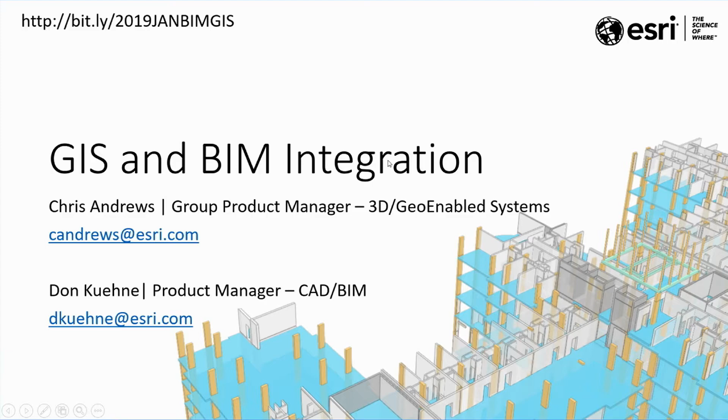I've started adding this simple safe harbor statement. I think Esri will probably have a few more things like this in the future. I'm happy to talk about future stuff, but you just need to understand that you can't blame us later if you make a business decision and we change our minds.

It's pretty standard at other companies, and we're starting to see Esri professionalize a little bit like that. The team that Don and I work with, if you look at it from one direction, we're called the 3D and Geo-Enabled Systems team, which is a mouthful. But if you look at the product areas from a different direction, it's actually kind of the entire smart cities and project delivery story. So we cover apps for EMS, police and fire. We cover apps for asset inspection. We cover apps for urban planning, utility, parcels, AEC, CAD, BIM, a variety of stuff in the team that we have, and we're expanding quite a bit, and we're going to be doing more.

Jack and others talked this week about the geospatial cloud being kind of not just a rebranding, but a reformulation of our core technologies for on-premises or cloud-based delivery of geospatial capability anywhere across large organizations. And then there's this other thing they talked about, which is that we also are recognizing more and more—and I've recognized this since I started my career—that many people who use GIS information never want to spell GIS or hear GIS used. So these systems are largely focused on people who really don't care about GIS, they're just trying to get a job done. And we hopefully will see more come out of our group around that kind of concept.

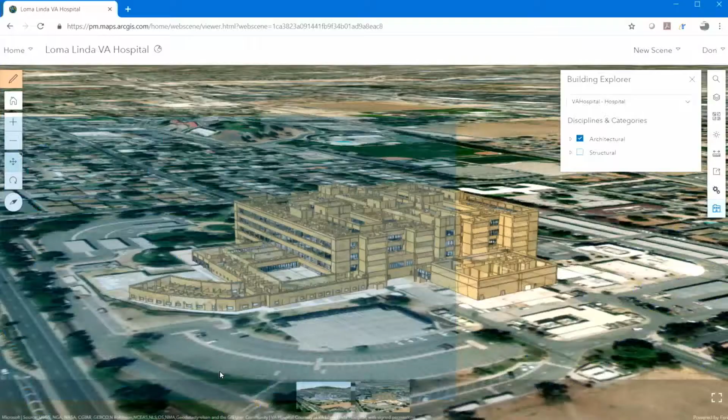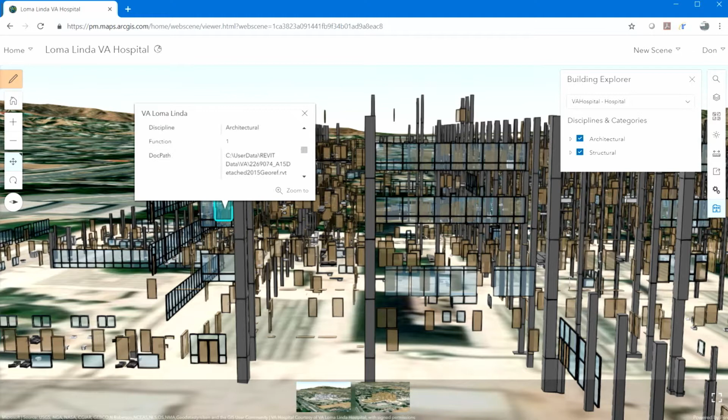I don't know what's going on here. Do you have anything? But as soon as we started saying that we could handle massive data sets, people started sending entire buildings, trying to shove entire buildings into this data format. You know, maybe I can Skype over to you or something. This is weird, I haven't had any problems all week, so let's try that really quickly. Are you online? Because I am. Hold on, sorry folks. I will ping Don and we will... I may not be on. Nope, it says you're offline. Are you offline? Sorry, folks, we tested before, honest.

That's fair. Yeah, I'm going to Skype to you. So as soon as we started to say that we could handle really large data sets, people started basically shoving whole buildings through these formats that we were coming out with. Oh, Skype, so. And that was a big problem because what we often then got was that the initial scene layer formats and things we had basically couldn't handle it.

We had a lot of performance complaints and a lot of issues that were brought up by customers. So let's see, all right. There, you're there. It says I said hello to you. There we are, okay, all right, so let me do this. Kill your conversation. No, because that'll, yeah, all right, we'll go with that. You guys can see it? It works? Okay, that's better. All right, so let me go forward.

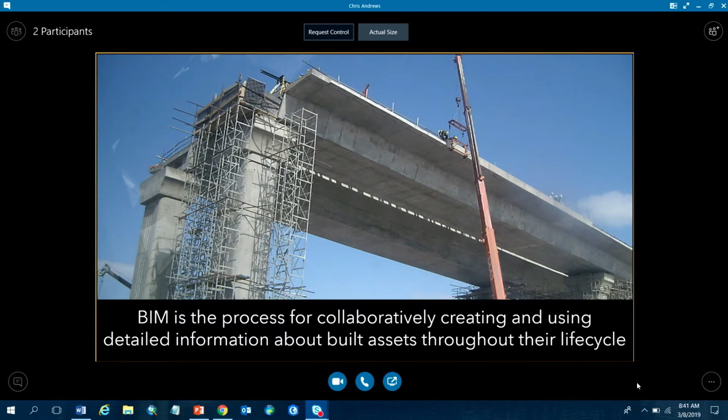BIM really gets introduced because it introduces tremendous cost savings during design and construction, but we're seeing increasingly the demand and legal legislation for BIM usage throughout the life cycle of assets. And that's actually pushing it more into what might have been traditionally called the GIS space.

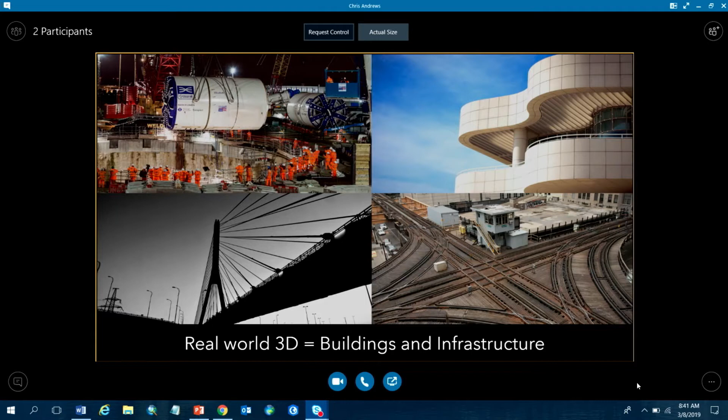What the Esri community kind of didn't realize was that for the classic BIM community, real world 3D is buildings and infrastructure, right? It's not Jello cubes and billboarded symbols. It's actual bridges and buildings and roads and highways and things like that. If you look at the problems that occur around a city or urban environment or even large rural projects...

What you'll see is that all of these different problems typically have those components I talked about earlier. Who is it affecting? Where is it? What is the asset involved? And then at what time scale, or at what time, did this happen?

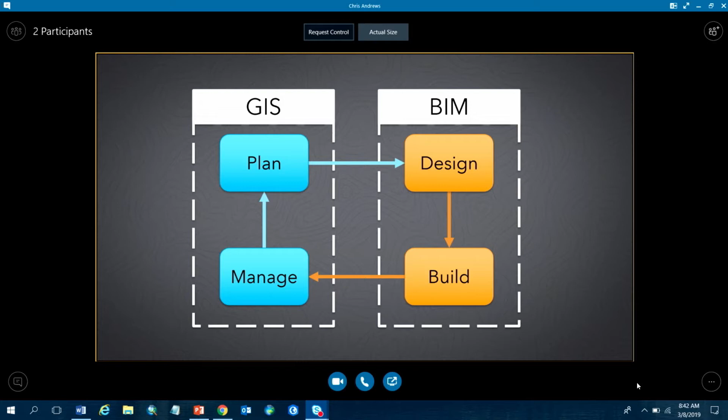There was this classic view that we still use sometimes to describe especially the integration of CAD and GIS: you plan something, you design it, you build it, and you manage it. I really always struggled against that because I've done CAD-GIS integration, I used to do enterprise consulting since like the early 2000s. What happened was it always felt wrong that there was kind of this idea that there was a perfect handoff between the CAD world and the GIS world. It's too simple. There isn't really this perfect handoff.

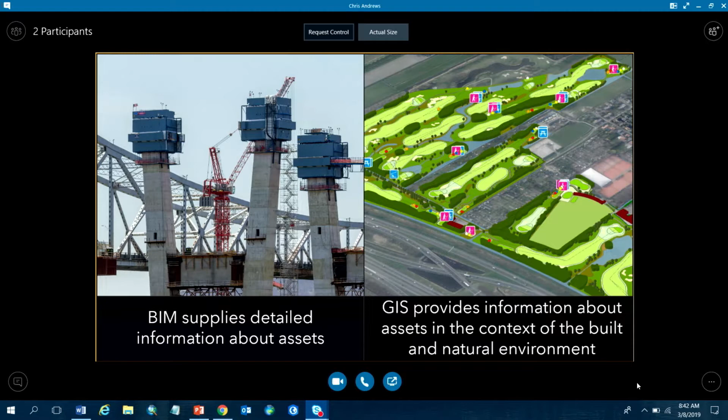What we know is that BIM supplies detailed information about assets, and GIS provides information about assets in the context of the built and natural environment. These two things should work together, and that's why a couple years ago we came out with this version of how the asset lifecycle and the BIM project delivery lifecycle actually are intertwined.

Cities, utilities, military bases are constantly operating and they're changing. They're planning that change, then they kick off projects that actually execute on that change. Then they have to accomplish getting that change back into providing the services that they provide, as a university, as a utility, as a school system, or whatever.

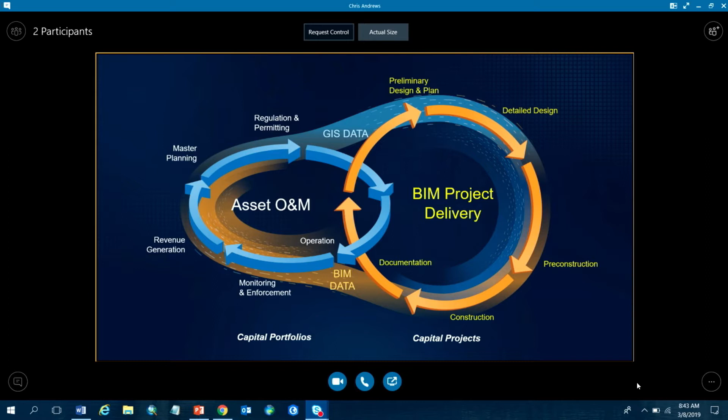We find that there are many, many really common pain points in classic BIM-GIS integration. We could probably double or triple this list and still not be inclusive of all the pain points. They are really classic, and some of them have been around for years. There have been new ones introduced as different technologies, like GIS and BIM technologies, have gotten more sophisticated.

What we realized is that there was no way we were going to solve all those things ourselves, so we started this partnership with Autodesk.

This architecture slide has been really useful to show to customers and users because many folks come to us and say, what's the common data environment between BIM and GIS? And really, the common data environment is BIM and GIS data, right? There is no magic new format that we're coming out with that's going to solve all of the integration pain points. There's a stack of data that owner-operators manage.

There are stacks and stacks of data that AEC services providers manage. The Denver airport expansion generated something like 9.2 million construction documents - schedules, bills of material, PDFs, CAD files, BIM files, and many more things. So we're not trying to suck all those 9 million files into GIS. We just want to deliver the right capability, the right data, at the right place, to the right people, at the right time, in the life cycle of those assets. Does that make sense, the way that we're looking at it?

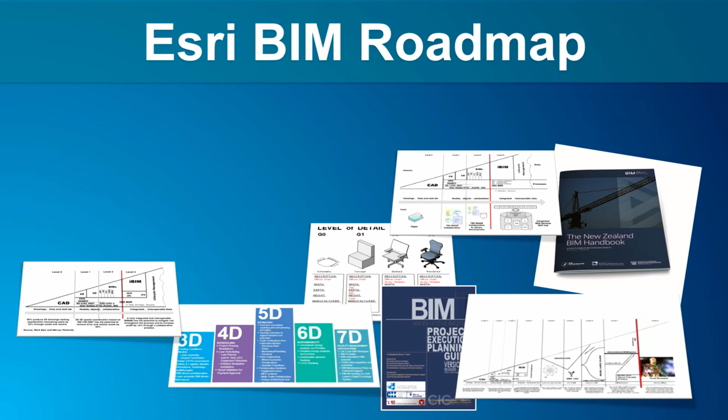At Esri, we have to take a look at the state of the industry, the perceived benefits versus the actual benefits, and plot a course forward. We understand that GIS is not an architectural design system or tool. It's something useful in the BIM process to further reduce uncertainty and give you more context for design. There are tools in GIS and the ArcGIS system that can share information for collaboration and stakeholder engagement, and there's real benefit in the two coming together.

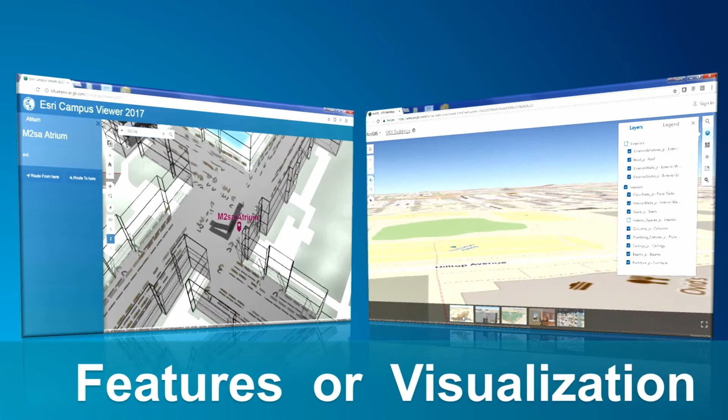So we take a look at how we approach BIM information. We've been able to categorize it from users like yourselves into two main buckets. There's the idea that I just want to see it, to understand a design that's coming down, or how this new development is going to impact the existing condition, or how the existing condition is going to influence this new design. So visualization, just being able to see it, has real value.

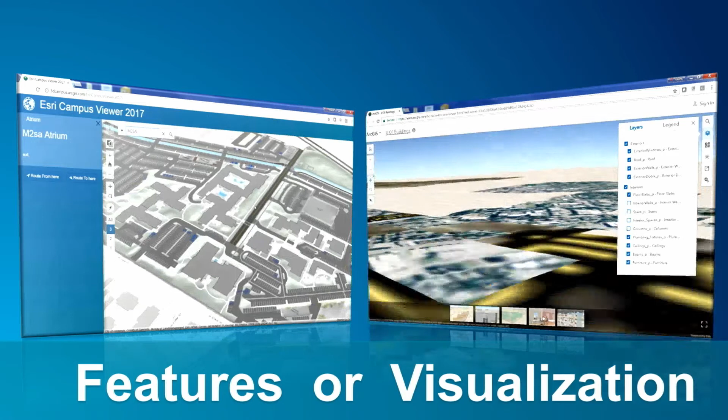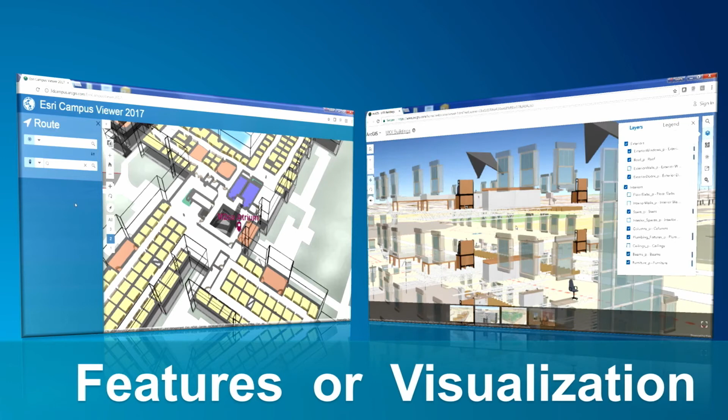The other bucket is: I want to use the information to fuel other business systems. I want to look at the features, the geometry, and the actual attributes, and compute things based on that information. I want that information to become available to me to get my work done. These two different ideas sometimes have diverging requirements in how information is stored and presented to the user.

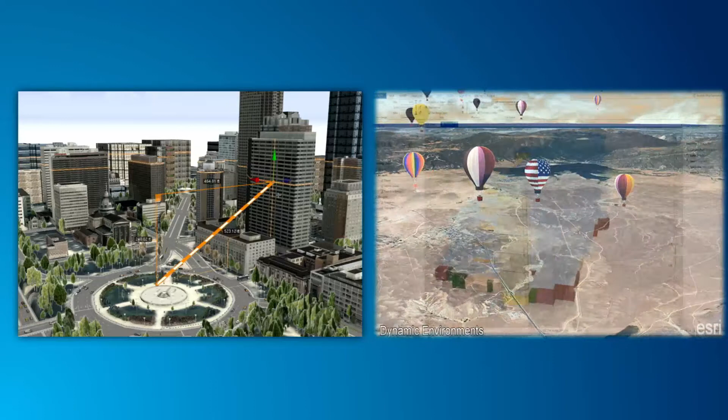As Chris mentioned, as GIS has become 3D, people have not been satisfied with just making 3D symbols—they're actually putting real-world objects into it. Esri continues to work on our 3D capabilities, but we're not necessarily trying to create 3D architectural design software. We're using the tools we have to provide real benefit.

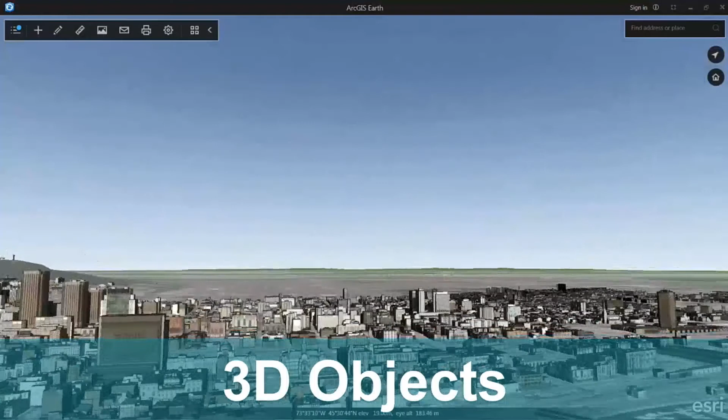Chris talked about some of the different layer types we're developing—these cached layer formats that allow multiple levels of detail to create experiences for huge amounts of data, like 3D objects, which are millions of boxes of textured buildings that we can blow through on a mobile device or in a web scene.

A similar type of layer format we have is a mesh. It looks similar sometimes to a cityscape, but this is the idea where you have a continuous surface of the globe, and as you move around in it, more information comes into the foreground and less in the background. That's the caching format that allows us to stream huge amounts of information.

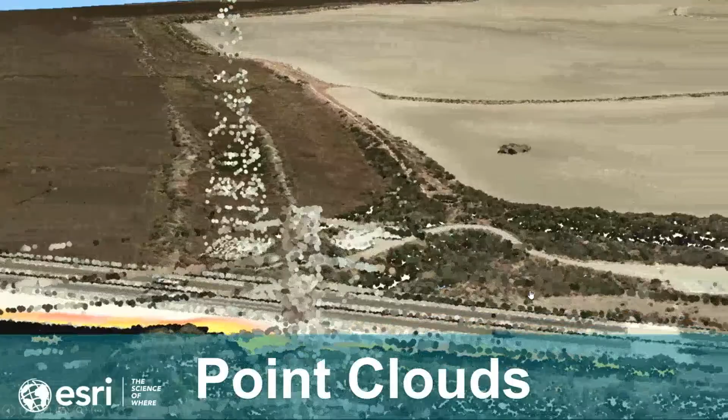This is a type of data normally collected from drones and other types of point cloud information that's generated into a mesh. I mentioned point clouds—just raw point cloud information—being able to take huge amounts of LiDAR, mobile-collected or aerial-collected information, and bring that into the same scene as all these other 2D and 3D formats.

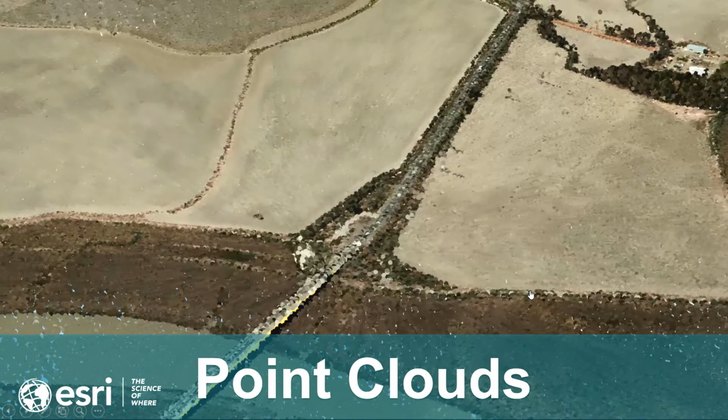We're also working on a new layer type for what you might call voxels, useful in understanding huge amounts of point cloud type information or voxel information. So we have all of these different things at our disposal, and we're trying to combine them into useful ways.

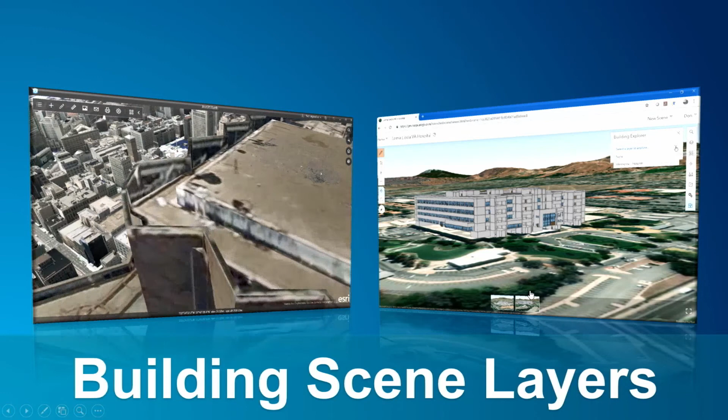On the left-hand side, we were doing an experiment with our 3D objects layer. We knew huge amounts of information were going to be poured into ArcGIS. There was one thing to have 1 million boxes in a city, but we realized that with BIM information, there could be millions of things in millions of boxes. So as some of the early research, they took the entire city of San Francisco and shrunk it down onto the rooftop of one of the buildings.

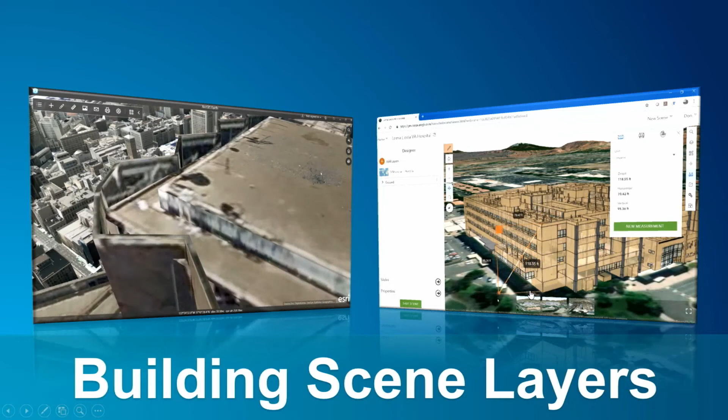On the right-hand side is one of the outcomes of that research, which is what Chris mentioned as the building scene layer—instead of dragging 20 or 50 different layers into one web scene, we encapsulated them as a group and added additional graphic hints to help us move through huge amounts of data even easier.

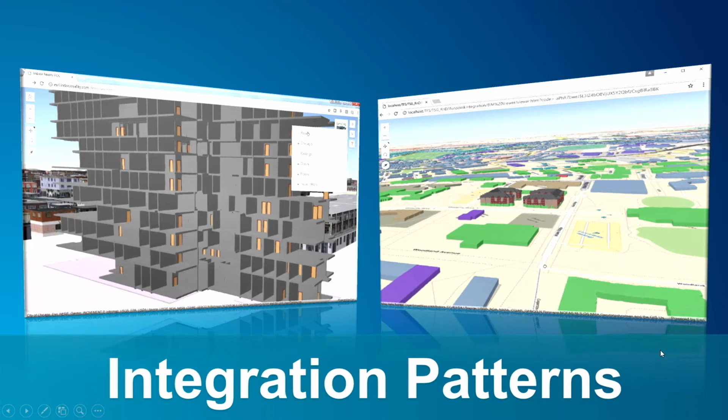One of the things we've noticed when we started presenting this information is that customers have seen their BIM information in a way they've never been able to see it before. That Houston Airport example Chris showed earlier—the people working on that project had never seen all that BIM information together in one place, and now they were able to see it in their geographic context.

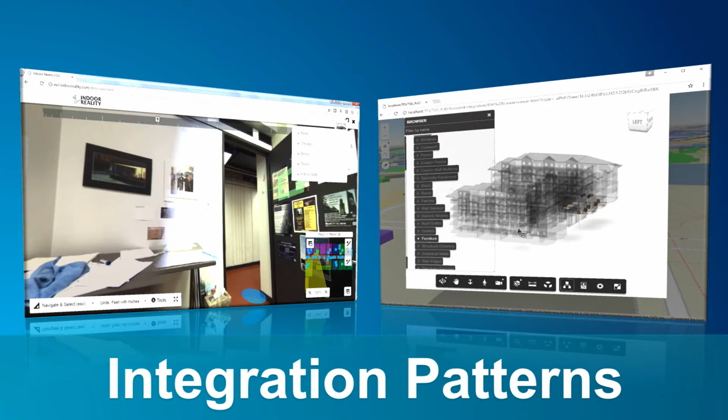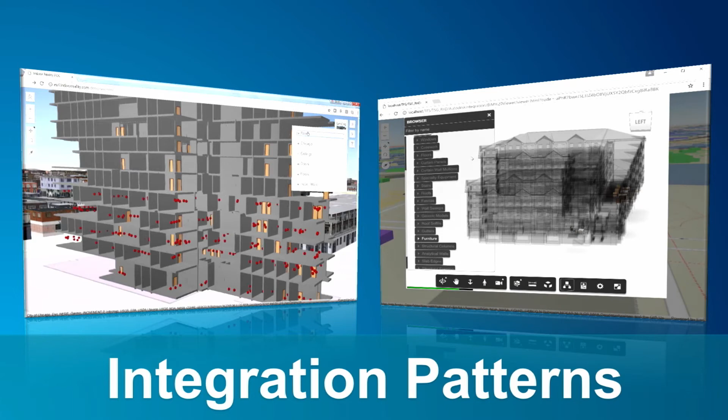One of the patterns we see evolving from this is that because people have access to all this geometry in its geographic context, they're starting to use it as a geographic interface to other business systems. Business partner Indoor Reality, on the left-hand side, has a scan-to-BIM type of process, walking through with a handheld device, creating spherical imagery and recording the geolocation of those setup points, and they've linked their viewer with the web scene.

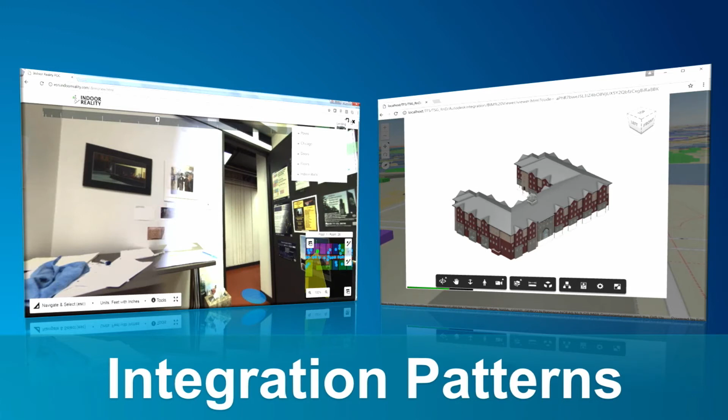A similar thing is happening on the right-hand side: using a BIM-sourced geographic representation in a web scene, then navigating to the actual BIM document in BIM 360, again with a simple link between the two different viewers—the viewer on the right being the Forge large model viewer.

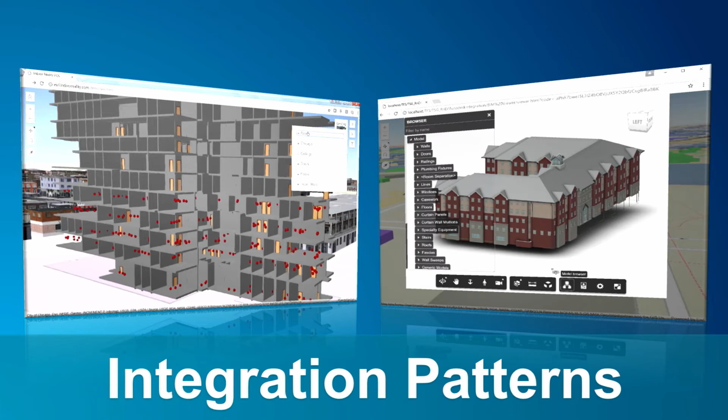Another pattern we see is this idea of the connector. ArcGIS for AutoCAD has been around for more than a decade, and it's the AutoCAD user's interface to the ArcGIS system. It allows you to generate ArcGIS data sets within an AutoCAD file and share them with desktop users. It's also an interface to the ArcGIS platform that lets you pull in maps and edit feature services. So the ArcGIS for AutoCAD application already provides AutoCAD and Autodesk users with full support of feature services and map services for editing, which would include Map 3D and Civil 3D.

That pattern is then being repeated. Chris mentioned the InfraWorks connector from Autodesk, a similar type of application that lets you take some of the parametric capabilities in pre-design and link those up with GIS data sets, using the attributes of the GIS to hydrate things like roads, site plans, and buildings using their parametric pre-design tools, where the Esri ArcGIS Online data becomes that source.

All of this is built on the Esri platform. The same Esri system that you're using to collect things in Collector and Survey123, the same data being managed or visualized in dashboards, is the same information that can be used in InfraWorks and AutoCAD. And we're looking to replicate that pattern.

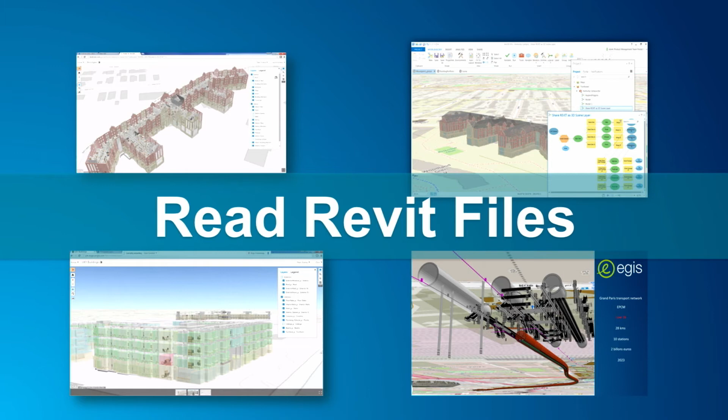Another aspect is making information more accessible to the GIS user. Last year, with the early release of 2.2, we were for the first time able to reach into a Revit model and pull out the geometry and attributes of information directly from a Revit file. And so we repeated another pattern like we do for CAD.

We can also read an AutoCAD DWG file, a DXF file, or a MicroStation DGN file, and when we do that, we read it as a GIS data set—essentially converting it in memory—and then we just use our GIS toolbox on that data set. We break it into, in the case of a CAD file, its geometric types that we understand: points, lines, polygons, the 3D object we call multi-patch, and the text as annotation.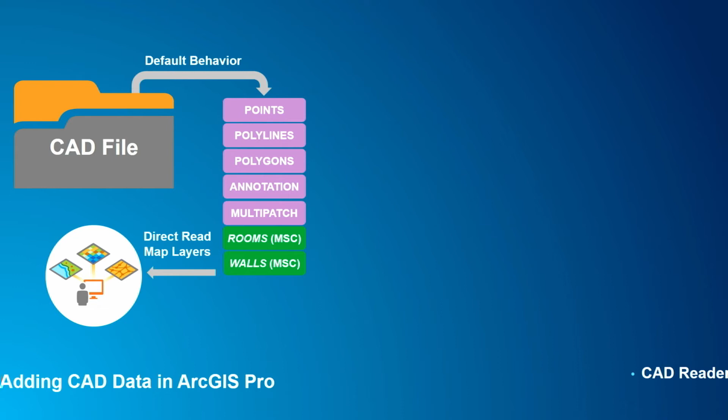With ArcGIS for AutoCAD, I mentioned you can create ArcGIS data sets within the DWG file, so you will see attributed feature classes in a DWG file as well.

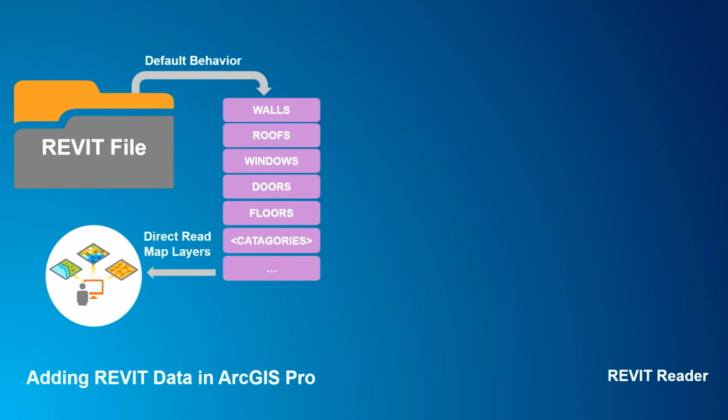For a Revit file, it is actually more structured than a CAD file, and so we were able to make a one-to-one correspondence between the categories in a Revit model and ArcGIS feature classes with their attributes. So the structure you see in ArcGIS reflects those Revit categories—we collect all the walls together as a feature class, all the windows as a feature class, all the doors as a feature class, all the structural columns as a feature class.

So here in Revit, I can create custom attributes, and I can rely on the fact that information I've chosen to include in my Revit model will be accessible to me in ArcGIS—whether it's an asset number or an omniclass classification. That information I choose to encode in the file is what ArcGIS preserves when it reads the file. So I added an attribute to that roof element, and when I pull those roof elements into ArcGIS, I have access to its geometry, but also to all the attribute information encoded on those objects.

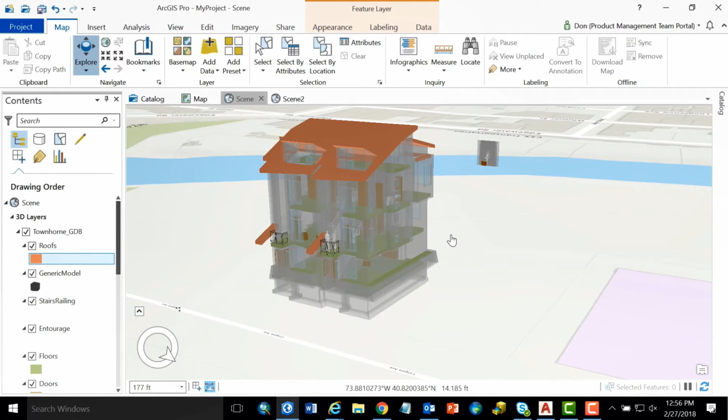When I read the Revit model, it's already an ArcGIS data set, so I can do things to it with my toolbox. In ArcGIS Pro, I can do geoprocessing—say, copy features and save it to a geodatabase. Or in this case, I'm using a geoprocessing command called export to CAD. An unusual choice, but what I'm doing is taking this GIS information sourced from a Revit model and exporting it to another format—in this case, an AutoCAD DWG file.

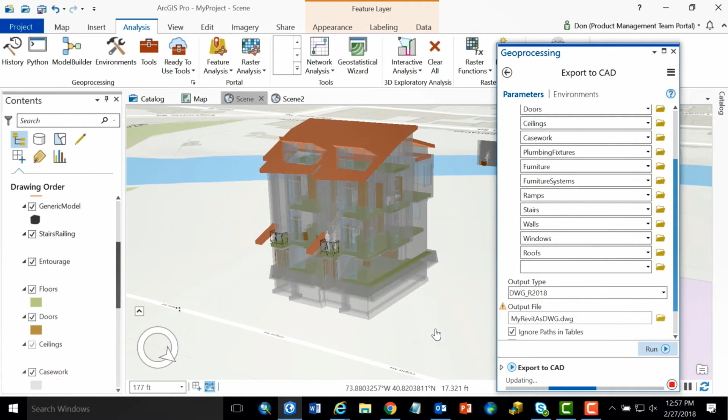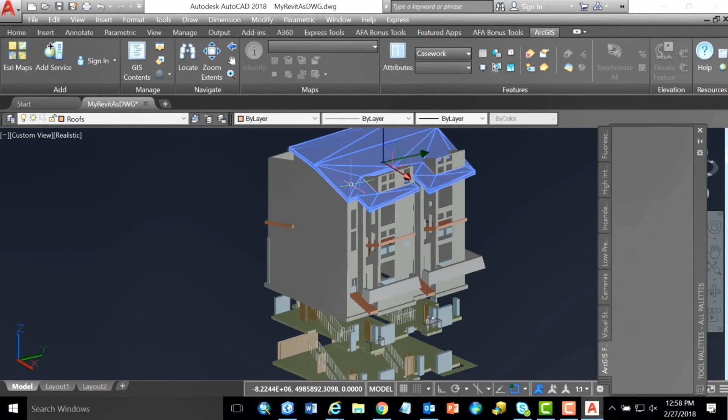It's going to create 3D GIS objects for me in an AutoCAD file. As part of the interoperability solution at Esri, whenever I export data into an AutoCAD file and I have ArcGIS for AutoCAD on my AutoCAD application, I see not only that geometry, but also attributed GIS feature classes. So in a sense, this Revit data has lived through that process, and I see those encoded attributes, but now inside another application.

Along the lines of ArcGIS for AutoCAD, in its next release it will have a stronger tie to ArcGIS Online and Portal. One of the great side effects of that is access to hosted services, which adds a whole new level of collaboration.

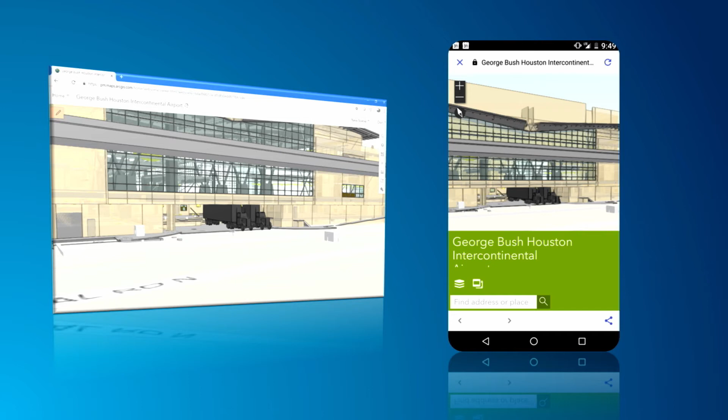We talked about the fact that this BIM or Revit information can live on into other experiences. So that information I encoded back in Revit, I can use directly in Pro, for analysis and computations. I can share it out for visualization and collaboration purposes, creating streamable experiences on different devices, while still having access to that information to link it to other business systems.

So there's a general pattern we look to replicate. We know that BIM information is in a lot of different formats—it's in a spreadsheet, a CAD file, a Civil 3D file, an InRoads or MicroStation file. We need to be able to pull this information to make sense of it in GIS, and also share with people at a file-based level.

We know that if we create plugins, we can help people create data that's more aligned with the GIS workflow—we can help organize unstructured CAD files, and guide people in creating Revit models that include data we care about downstream. When we do that, if we have tools that can read these files, we can make sense of them and use our toolbox to do smart things with it.

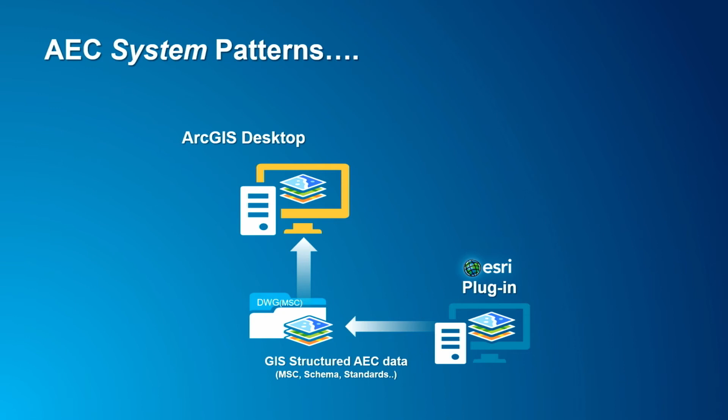We also know that if we can read that information, we can plug it into the rest of the platform to make it accessible to the entire GIS enterprise. So that Revit-sourced information is available in my phone app, my dashboard, my ArcGIS Pro session, and my ArcGIS for AutoCAD session. The ArcGIS platform makes that information shareable.

Those plugins, if they're smart, can also make connections to this same information to create these round-trip, connected workflows. Creating applications that can also contribute or create this information directly through services makes a lot of sense.

We have higher level GIS objects we also can take a look at. So some of the work we're doing or looking forward to is how the higher level organized objects in things like Revit pipe systems, electrical, MEP, or Civil 3D pipe networks and parcel information, tie together with higher level GIS objects like utility network, parcel fabric, or roads and highways.

Part of the forward-thinking work we're doing is how Civil 3D information moves back and forth, and how Revit or architectural design information can smartly move in a connected pattern—both to the AEC applications generating that information as a source, but also pulling GIS information into those applications as GIS context. A lot of times, a GIS has all the information that becomes the design constraints for the designer working in InfraWorks, AutoCAD, or Revit. So we're looking at those possibilities.

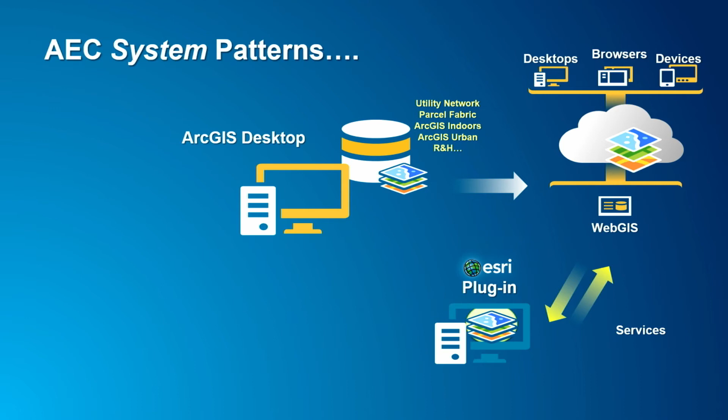One of the efforts we're currently working on is a research project for Revit. What would it be if I could use mapping information in my Revit model to help me geolocate things—type in an address, add the map, define my coordinate system, locate the position of the corner of my building, and save that information so that when it comes into ArcGIS Pro, it's already georeferenced, placed exactly where it needs to be.

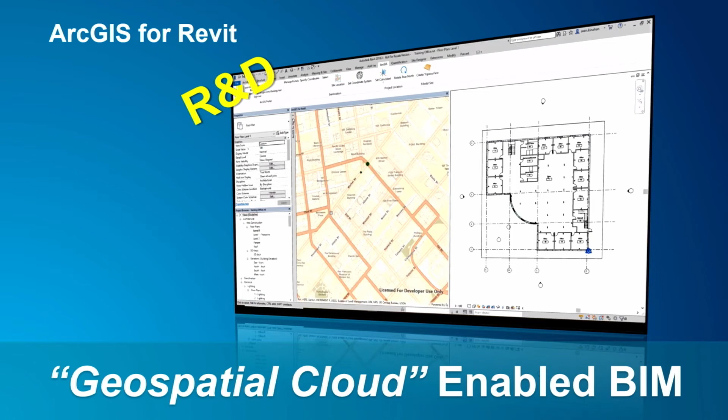What benefit would there be to pulling in more information inside the Revit application for things like terrain? What if I want to get an idea what this terrain looks like, or know where existing utilities might be, or how it's positioned in the context of the roadway network? That might help me make decisions about how I orient my building or which side of the building I make connections on.

Other feedback we're getting is that this Revit information is great, and like Chris mentioned, there is a large market segment it serves. We also know that internationally, especially in Europe, there's a big push toward IFC, and currently we support IFC through the data interoperability extension, but we're also looking at possibly reading IFC file information directly.

It would work in a similar way to how we handle Revit models. Some of the additional benefits are that there are more IFC types that tend toward things like civil infrastructure that we might also be able to pick up. But again, that's just on the horizon.

Other work we're doing - we recognize that civil infrastructure is really a part of BIM. One of the other projects we're embarking on later in 2019 is directly reading Civil 3D files as enhanced CAD drawings, pulling points, lines, polygons, and any organized information similar to how I could pull in ArcGIS for AutoCAD data. We're also looking at Civil 3D objects directly, things like alignments and pipes and other higher level objects, giving you access to that information directly.

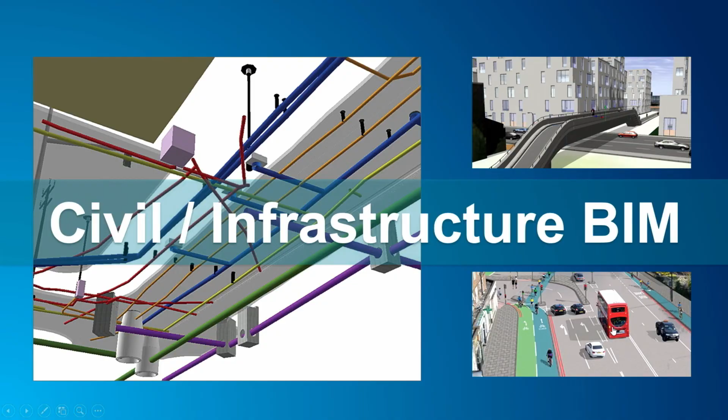All right, so we'll go back to... so with that, Chris has some wrap up here. I should stop sharing. All right, so I wanted to show you folks something, and just let you think about where we're going and what we're doing.

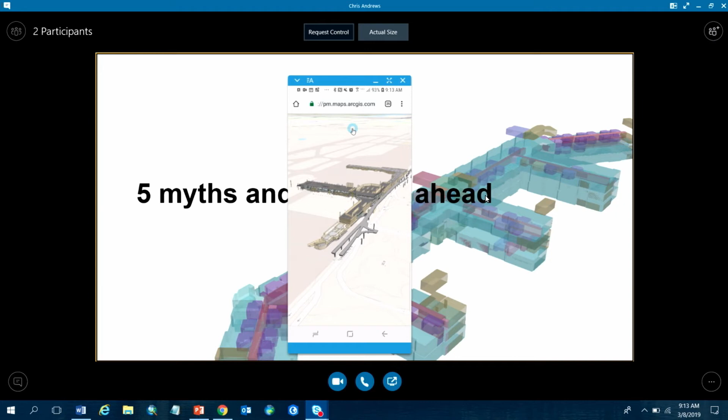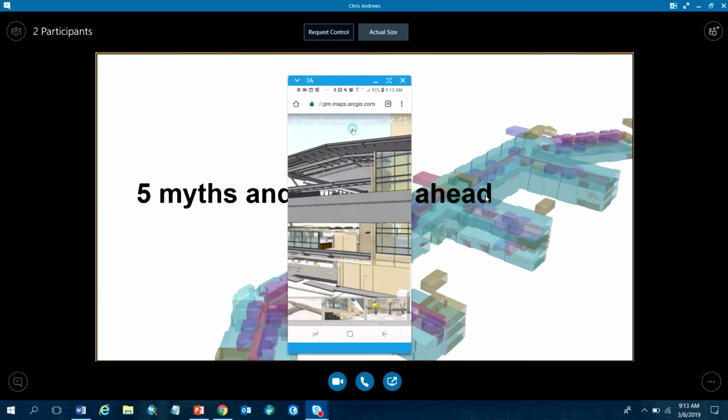So what you see right now is, I think about 6 gigs of Revit data streamed for Houston George Bush Intercontinental. This is on his phone, right on my phone. I'm just using the conference center Wi-Fi, nothing special - it's literally my standard Chrome browser on my phone, looking at ArcGIS Online, streaming in this new scene layer, the newer scene layer format we talked about. It may be that if I zoom around we'll see some lag, but actually it's pretty good - you can see some assets pop in the background.

Somebody at another conference I was at recently - Don didn't present with me on that one - listened to me talk about these fundamental data layers and things like that. He told me it sounded like we were building an excellent 19th century steam engine when what we really needed was an airplane.

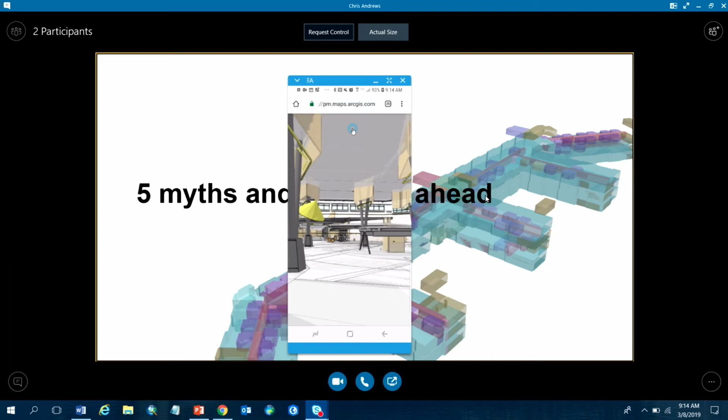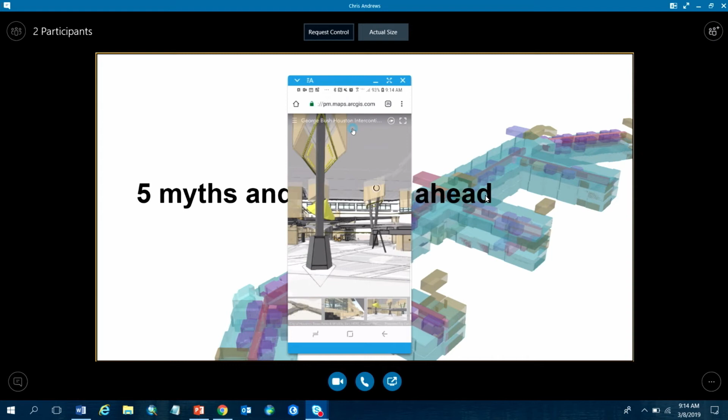I understand that perspective - there's a lot of expectation out there around where we need to go to accomplish asset management workflows and integrate BIM information, detailed design and construction data directly into the lifecycle asset management process. People look at this and say, well, if I can click or tap on this asset and see the actual detailed attributes and metadata that came from my Revit file, why can't I just have that Nirvana asset management system already?

But what I would simply say is that there are so many fundamental missing connections between the BIM world and the GIS world - really the project delivery world and the asset management world - that we are having to basically start to solve and address. I think many of our customers and users don't really understand that.

Especially in Europe - no offense to any Europeans here - but I find there's a lot of top-level language around how BIM is for the life cycle. When I go meet with transport ministers in Germany or similar folks in France or the UK, they've got the top-level messaging in their head and they've bought into it without realizing the difficulty and the lack of historic connectivity between these two domains that have really differentiated substantially in the last few years.

So I'm actually, one of the things I've told people is I'm always shocked at how much bleeding edge tech I've actually worked on since I joined Esri.

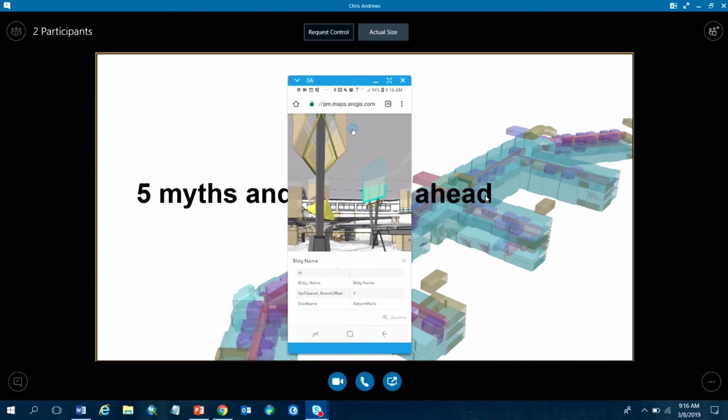It's definitely not a sit in my rocking chair and cruise through the rest of my career kind of situation. We are constantly having to deal with complicated problem sets that actually have not yet really been solved.

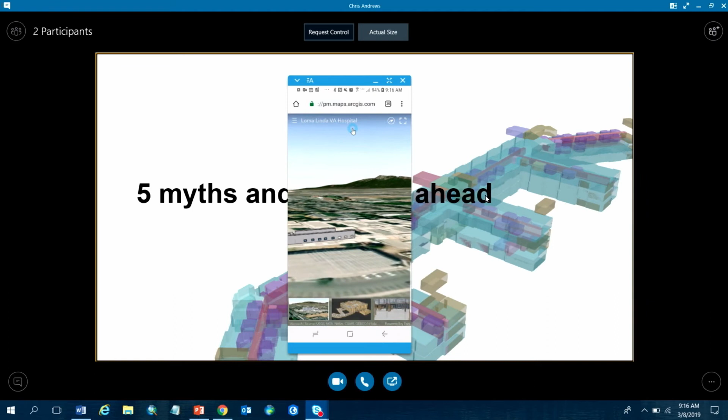Just to show you the other example that I've got here, this is actually the building scene layer. This is the Loma Linda VA hospital. So there's one view of it that I don't really like, which is we do this building exterior thing. But if I go back to the BIM, the actual BIM attributes, they load really fast.

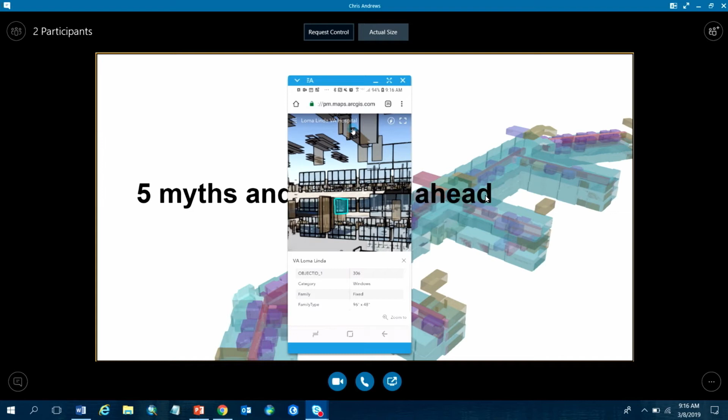So this is a bunch of mesh data coming out of Revit. And then if I've got some little bookmarks in here, I can go inside the building again. And this time I can also tap on this and I can see that I've got all the metadata, just like I did in the last one.

Except in this case, there's a single entry point to this. This whole building has one REST endpoint. This is the Dev Summit, so I can talk about REST. So there's one REST endpoint that you can use to dive into and start searching through and accessing the data in this scene layer.

Where we will go in the near future, so the next release to two releases of Pro and Online and Enterprise, is that we will actually hook up underneath this a set of feature services that actually allow you to do things like hook up Collector to the objects in this BIM layer, this building scene layer, and actually allow you to start to do things like Collector or Survey123, right? And actually allow you to do things like directly change the attributes in that scene layer, in that BIM model in GIS, from simple lightweight apps like Survey123 and Collector.

So we are actually trying to help you build that airport, but because we're not going to be able to do everything in that domain.

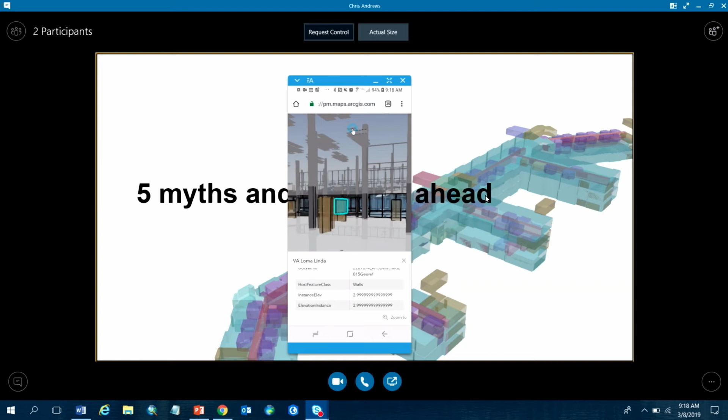But I just wanted to show you these things, and it's just fascinating to me that I can do this on my phone now, right? I mean, there's no way that a couple of years ago that I would have said, oh, I'm going to actually have the entire Loma Linda VA hospital as a Revit file translated into GIS, accessible through the cloud on my phone over conference center Wi-Fi, right? And have it be effective.

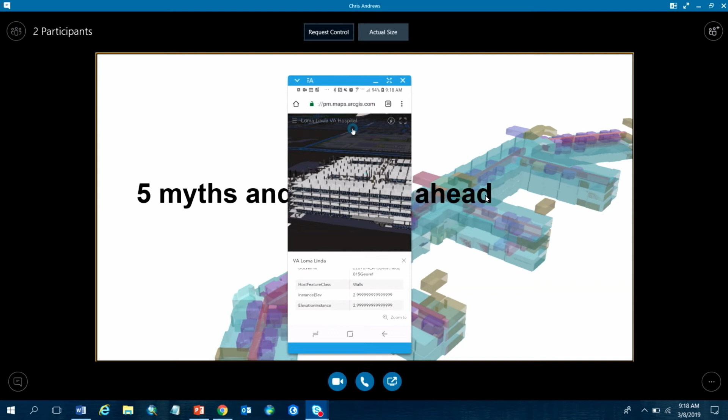It is very effective. The number one demos for us over the last couple of years have been these kinds of BIM data demos, first on desktop and then now increasingly on mobile, especially with the high level kind of exec types in our AEC service provider customers.

All right, I thought I'd just walk really quickly through some of the topics in an article I wrote a few weeks ago that actually was based upon a conference talk. Just because maybe you can hear some of my perspective live on some of it. I probably changed the words and a little bit of the sentiment slightly to get it into written form on the blog. But these myths and realities kind of came out of many years of working around first CAD to GIS integration.

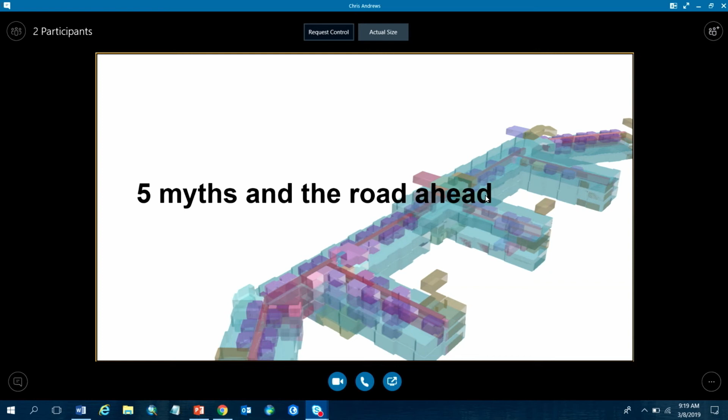The first CAD diagram I ever put online was a plat map as a scanned bitmap image in 1997 in a Java 1.1.8 applet. So I've been touching this space, not quite as long as Don has, but for a long time as well. All right, so there are 5 myths about BIM in the GIS world.

My favorite one is when people tell me that BIM is for facilities management or that it's for 3D modeling, and then my third favorite is that people tell me that it's only for buildings. It's simply not true. We do hear also that BIM provides GIS features.

Micah at, I don't remember where he is right now. I can picture the company logo, but I can't think of the name. Somebody emailed me a couple weeks ago that I was wrong about this second item here, that actually you can find GIS data in lots of Revit models. And I wrote back and said, well, I'll give the guy $200 if he can find 5 Revit models from 5 customers that have building shells, building footprints, floor plans, and rooms and spaces that I can use immediately in GIS. You know, Don, your comment was something like my $200 is safe or something like that, right?

Yeah, so all right. There's this idea that there could be a single file format that can provide BIM GIS integration. And then there's this idea that you can't actually directly use BIM content in GIS. Well, I think I've already shown you that it's possible to do so. And then finally there's this idea that the GIS is the perfect repository for BIM information.

I argued very heavily with the Dev Summit plenary folks, because they had a slide showing Revit into Pro with an arrow into ArcGIS Online. And I said, there's no way you can show that. We are not turning ArcGIS into a doc repository for BIM information, right? Back to my 9 million construction document comment.

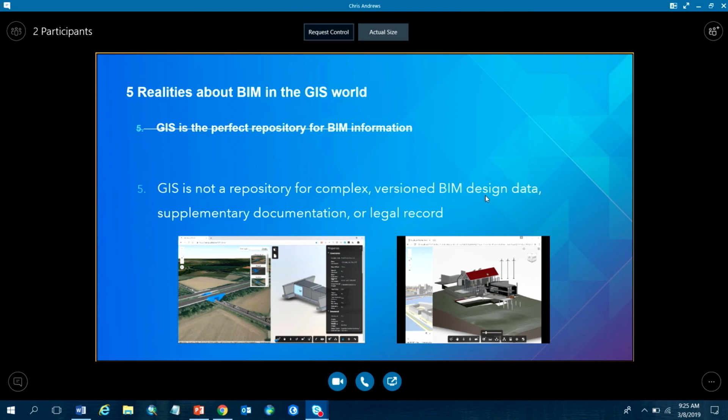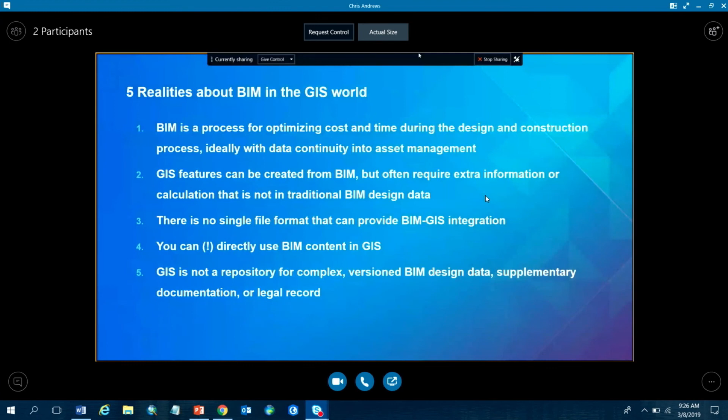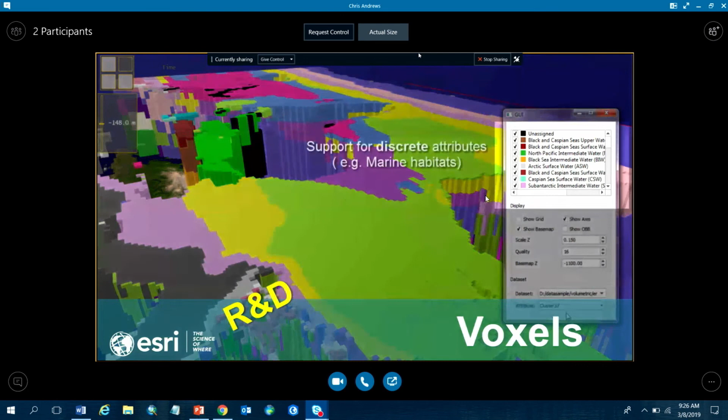Don already showed it. The reason I wanted to bring it up is because we are, oops, all right, it's not gonna play now, that's okay. We are actually doing some things that at first seem kind of sciencey or maybe not relevant to this story. But there's a lot of civil and geotechnical engineers that want volumetric representations of subsurface aquifers, geology, other things. We have other efforts in Esri that will intersect with some of these BIM plans, and I'm quite excited about some of this stuff.

There's a lot of stuff we are doing in the future as well. We've rolled out a lot of functionality. I already described how much our jobs have changed in the last few years. 65% of my time these days is spent talking about BIM and GIS. We're rolling out new urban planning products. We are doing things to have better materials and things like that in ArcGIS. We've got mobile 3D now - there was none for the first 3 years of my existence here.

I talked about the voxel stuff a little bit. We're even rolling out a new packaging format for big scenes so that you could literally take a terabyte or 2 or 3 or 8 of data into the field on a laptop, and actually have a highly performant 3D experience with an app that you create or with one of our apps. And there's lots more exciting stuff coming down the road.

We just bought this indoor positioning systems company. I definitely want to have the blue dot in my Revit model as I walk around a campus in the not too distant future. We're going to work with them - they literally just got acquired. We're going to work with them to figure out how to get their tech across ArcGIS for use in a variety of applications and SDKs so that you could build your own applications with it. And there's a lot more that we're planning as well.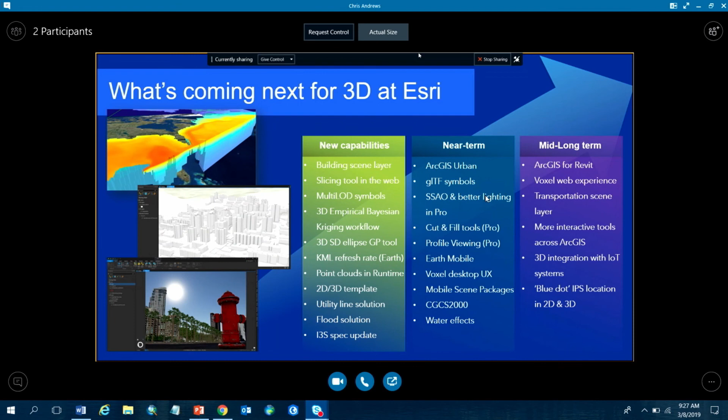Yes sir, just a question on the schedule of IFC support. So the question is, what is the schedule for IFC support? I'm interested in some more details on the versions of IFC formats and what capabilities - read some parts of it, write. So the tech that we're looking at to read IFCs is coming out of the ODA, and they have challenged themselves to be the best IFC reading capability. The first crack at it that we'll get is probably late 2019. As far as what versions of IFC we'll support and what profiles, it's kind of yet to be seen. But our first crack at it, we won't even be able to start working on it till toward the end of 2019. That group is pretty capable though, and they've been working closely with buildingSMART and other international sources to really pump some energy and investment into that capability. That's kind of our plan, would be to pick it up from there.

And there's a lot of, I would say, confusion in parts of the industry about what's in IFC. I was in a conversation with one customer not too long ago, and I pointed out that some of the things they were talking about didn't exist in IFC yet, because they were talking about some proposed rail and other standards that just haven't made it - it's actually not in the spec. That's another whole issue, is just even finding out what a particular customer means by IFC. As Don said, a lot of it is actually historically architecturally centered. It came out of Building Smart, but now they're getting pushed to do a lot more.